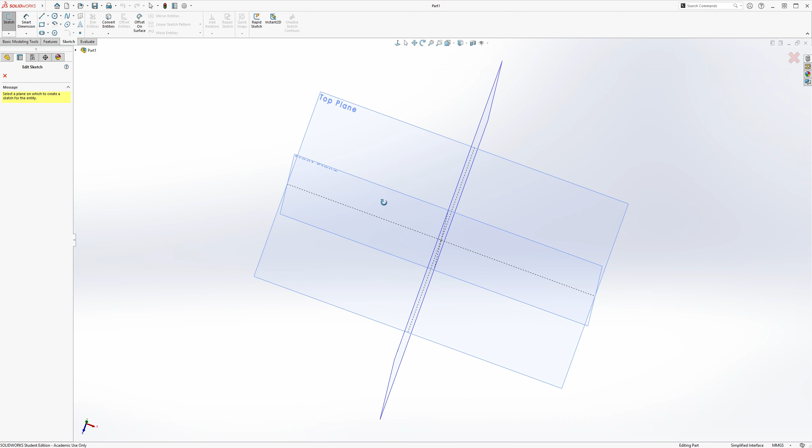And then we're going to make our rectangular base with a center rectangle. It's a 15.8 by 31.8 rectangle.

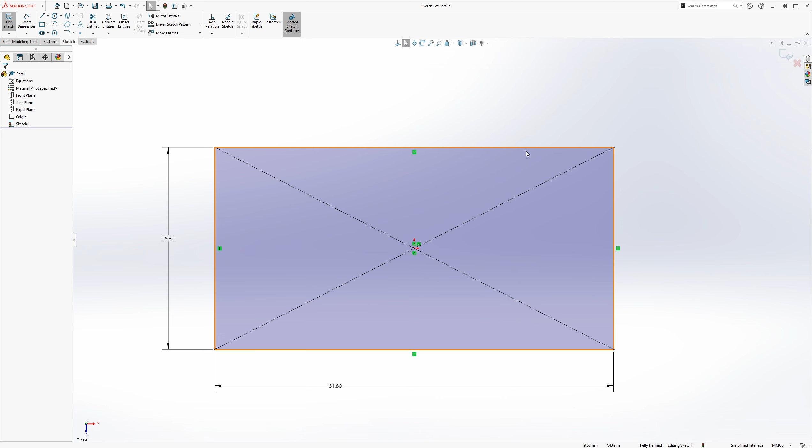And it's going to be extruded upwards by a depth of 9.6, but we're not going to extrude it normally. We're going to use the thin feature in order to make kind of a hollow extrusion. I believe it works in a way where it kind of automatically offsets the shape that you drew.

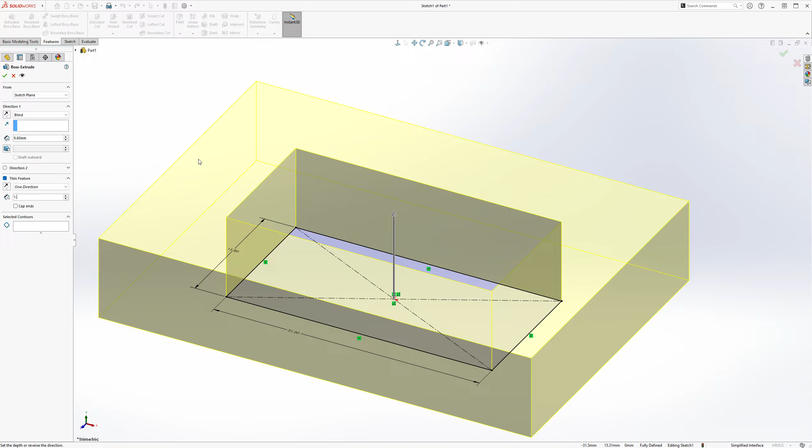And so we need to figure out what the offset itself is. I believe the offset is 1.4, and it should be offset inwards like this. Let's make sure it's 1.4. Yes, it's 1.4, 1.4 offset inwards for the thin feature.

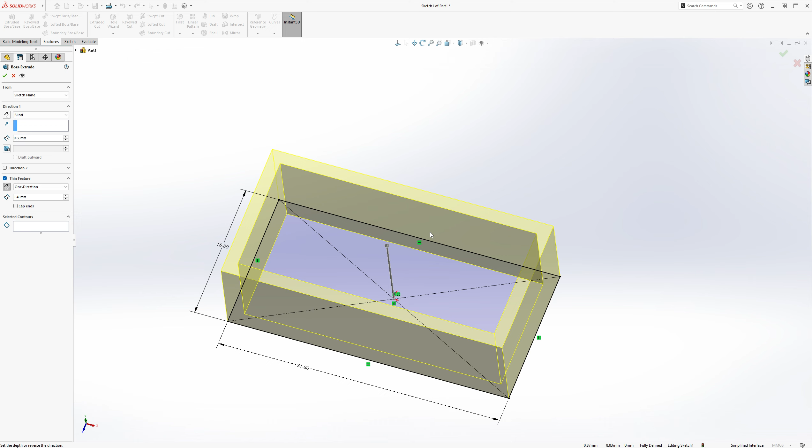And once I click OK, you'll see that both ends are open like this. So we'll have to make an extrusion at the top. So I'm going to make a sketch on the top surface.

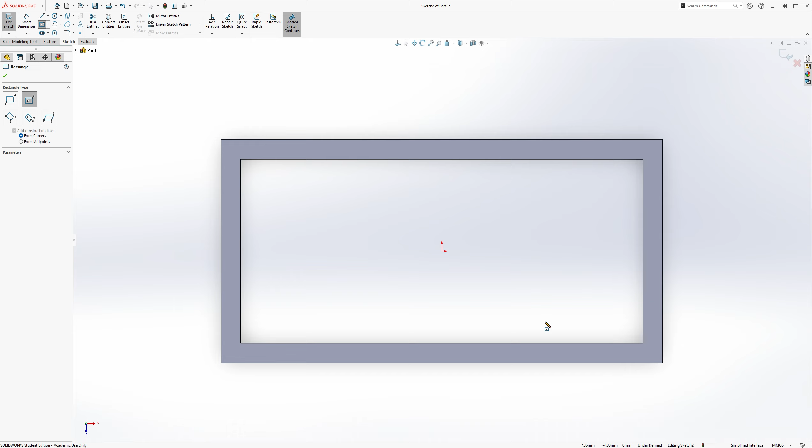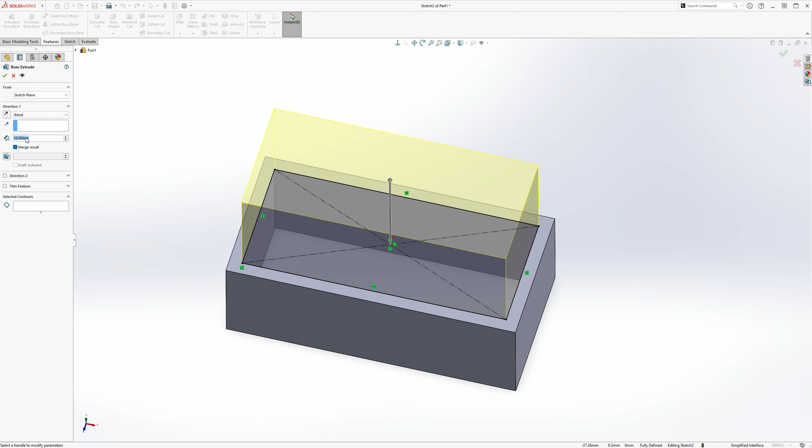And we'll make our same center rectangle, but this time I'm going to extrude it downwards. So first we're going to make the center rectangle fill in the entire gap. It's fully defined, and we'll extrude it downwards into the extrude by 1. This is going to serve as our base for the ceiling of this part.

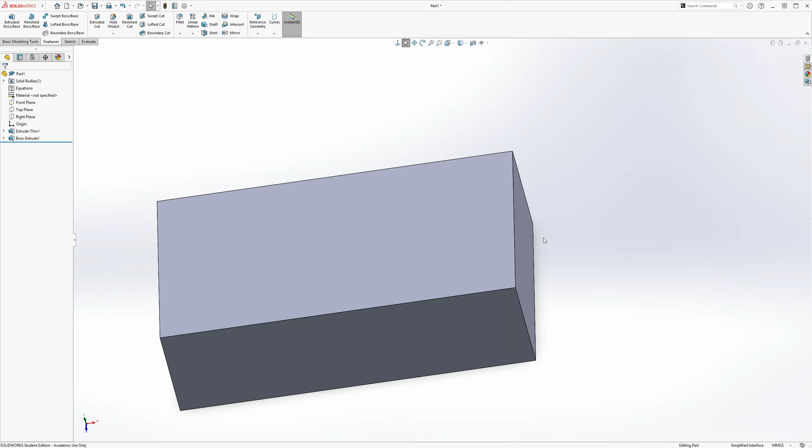So this is where we're going to have our circular pattern for the circle extrusions at the top, and this is also where we're going to make our circular cuts inside of those circular extrusions. So we'll start with the easy part, which is circular pattern on the top. I'm going to make a sketch on the top side.

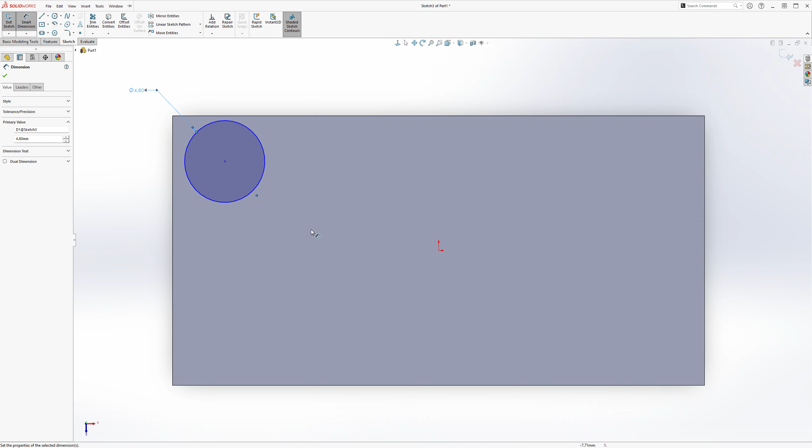Start with an arbitrary circle. Its diameter is going to be 4.8. Its horizontal distance from center point to origin is going to be 12. And its vertical distance from center point to origin is going to be 4. So now it's fully defined.

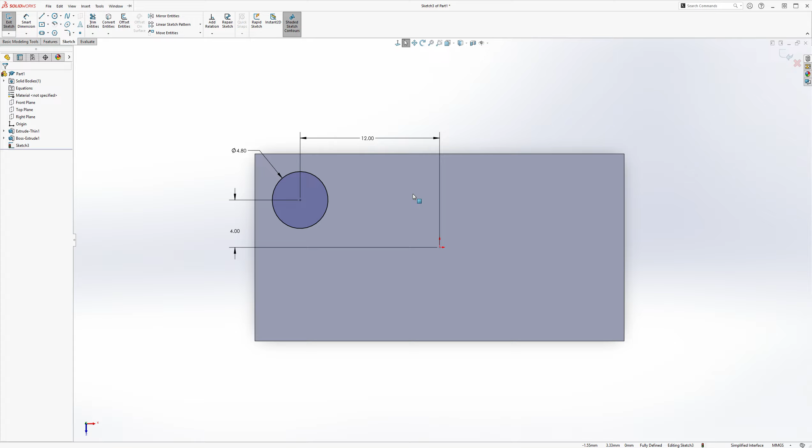Then we will extrude this upwards by a depth of 1.8, and you get that from the right view. 1.8. Select OK.

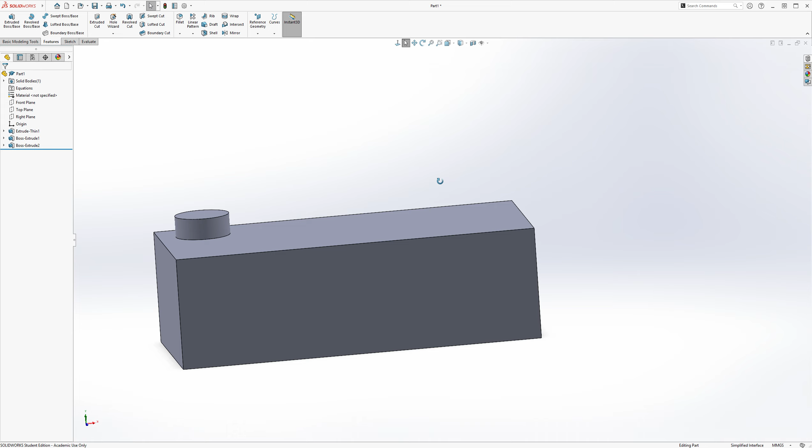And we could go ahead and pattern this right now, but I want to go ahead and make the hole incision that's going to be made inside of this extrude first, so we can do a linear pattern of both features at the same time. So I'm going to make a sketch.

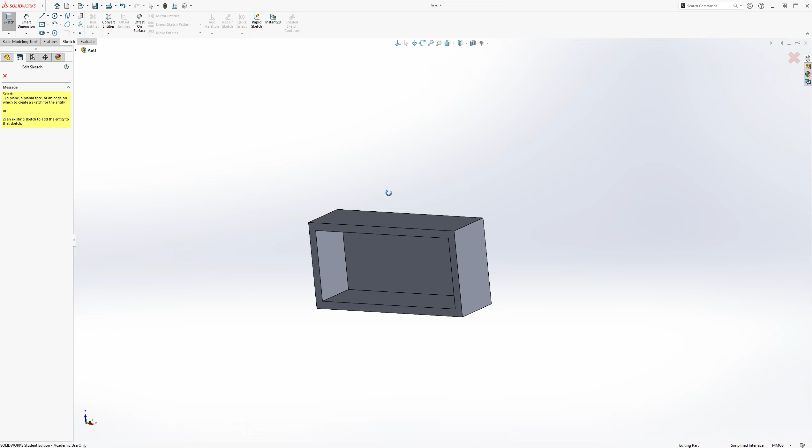Yes, I'm going to make a sketch on this bottom face here. And then I'm going to have to make a circle right here. So this circle is going to be pretty much underneath the previous circle that I made.

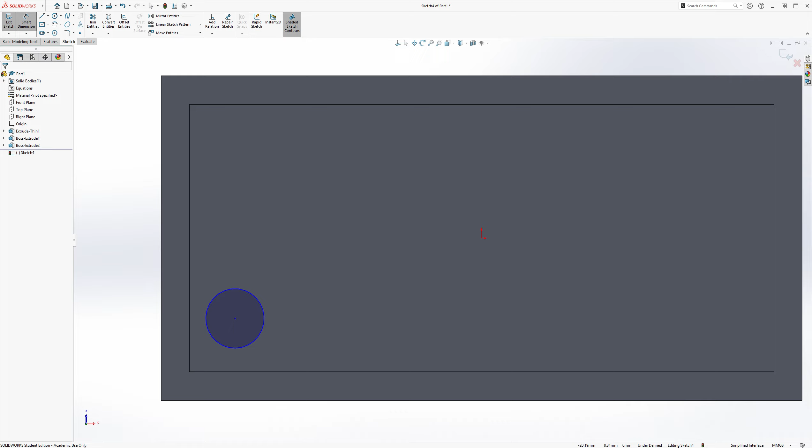And let me find its diameter. You'll see it from the underside view at the bottom of the engineering drawing. So it'll be 2.6 in diameter.

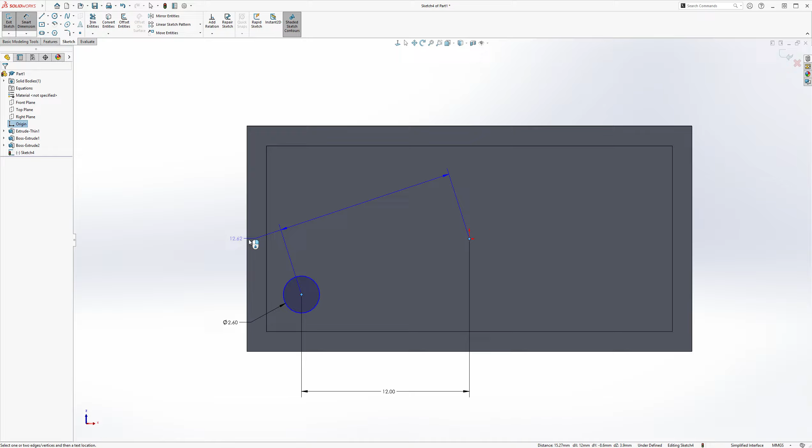And its center point dimensions are going to be the same as before. Because it shares the same exact center point, it has to have the same dimensions. So its horizontal distance from center point to origin is going to be 12, just like before, and its vertical distance from center point to origin is going to be 4, also just like before.

So from here, we need to make a cut. I'm going to go to Features, Extrude Cut. And then this is a weird part where we need to figure out what the depth of this cut is.

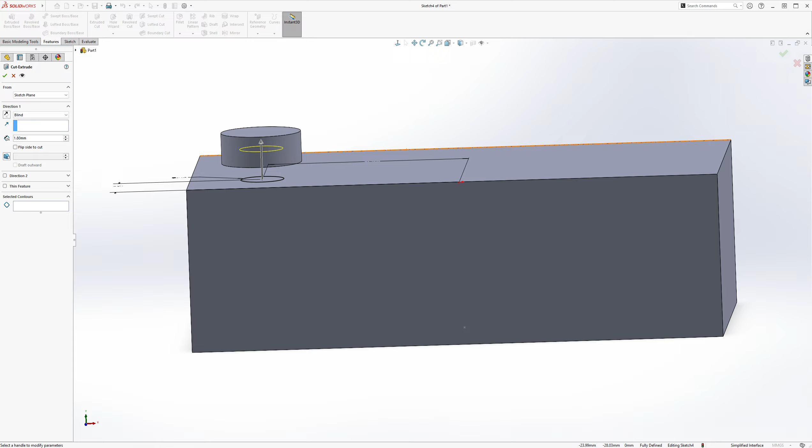So from section AA view, you see that the cut starts from the bottom of the ceiling, the 1mm extrusion we made earlier with the center point rectangle. It starts from the bottom of that ceiling and goes up, but it doesn't go all the way to the tip of the cap here. It only goes a certain distance into it.

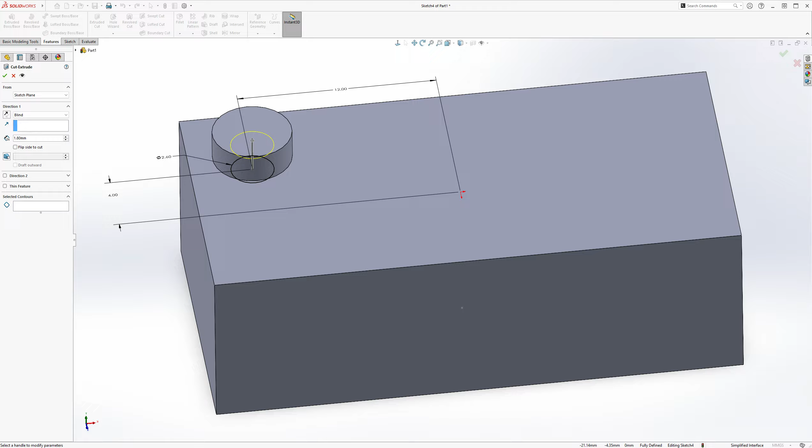So the height of the cap is 1.8, and the height of the ceiling is 1, so that total depth is 2.8. But if you look closely at the section AA view, you'll see that the distance from the top of this cap to the top of the extruded cut is 1.1. So you need to subtract 1.1 from 2.8, which gets you 1.7. So you know the hole has to be a depth of 1.7. There's a little annoying math you need to do there, but the depth is going to be 1.7.

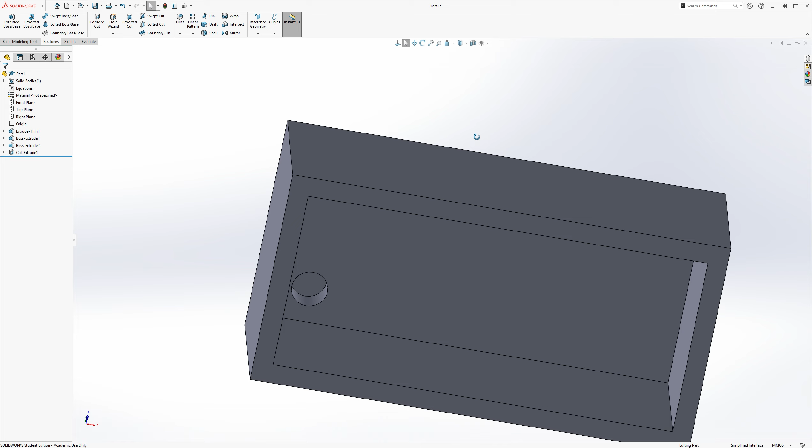If you made this circle from the bottom of the ceiling, so 1.7. So there's a hole, there's the cap.

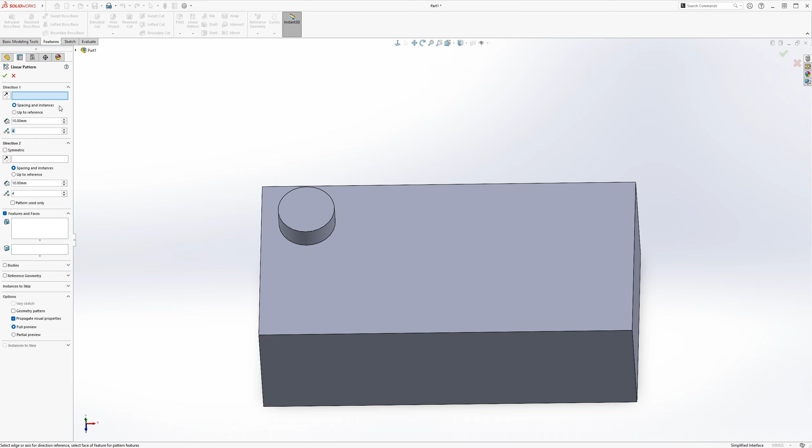And now we can just use linear pattern for features. We'll click linear pattern. There's 8 total, so it's 2 across and 4 long ways. Long ways will go 4 instances, our direction will be this, and our pattern will be first the cap cut or cap extrude, and then the cut itself.

I'm not sure why the preview is not showing. Oh, there it is.

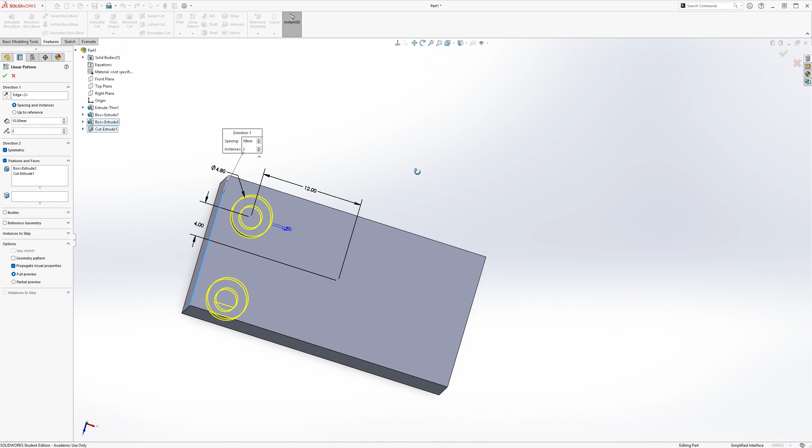So direction 1 - or maybe the wrong direction? Well, direction 1 should just be 2 instances then. Oh, I see, I think it's a spacing issue. So the spacing between them, spacing between each cap is going to be, I believe, 8. Yes, it is 8. Because the distance between the center point of one of those caps and the center line is 4, and then you'll do that twice to get to the next center, so it's 8.

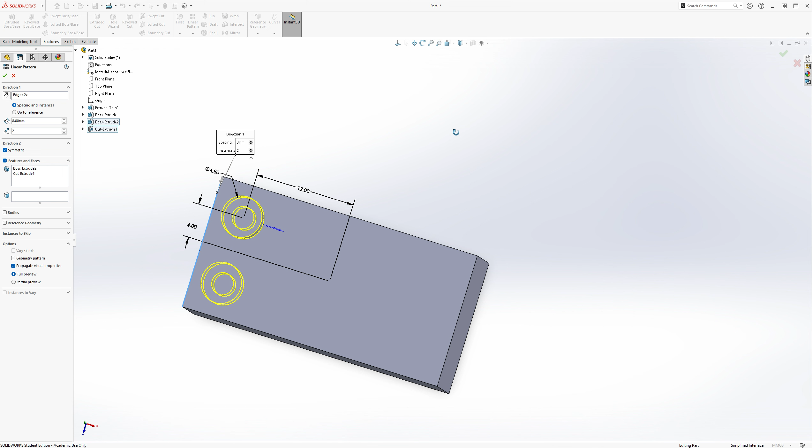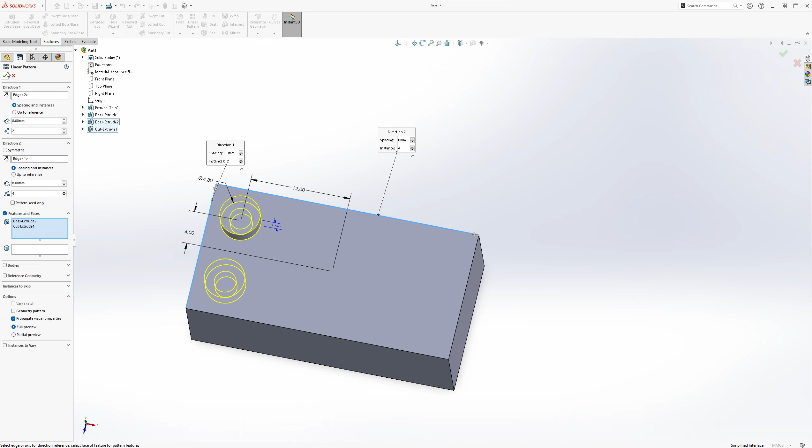So the distance between them is 8. We'll do 8 short ways, and then in the opposite direction - oh wait, hold on, okay let me reset this whole thing. That looked a little weird, not sure what happened there.

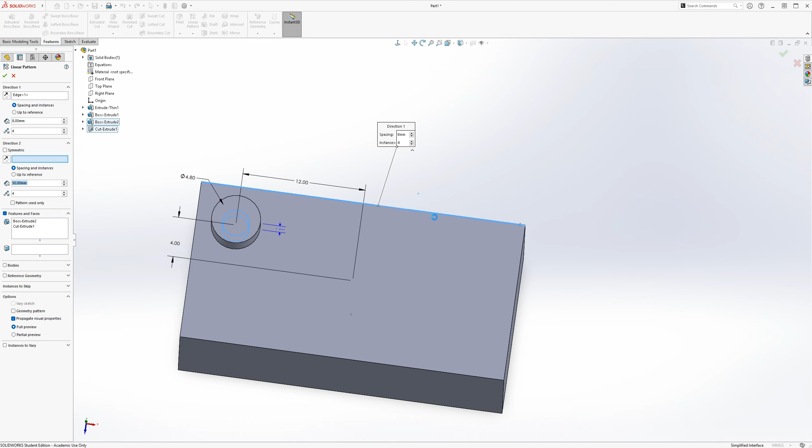I think I messed up the order of it. I need to set the feature first, so which will be the extrusion and the cut. And then I think we'll just do one direction at a time. So the gap between them is going to be 8, and the number of instances should be 4. The direction I want to choose is this direction. So I guess we'll just select OK for now.

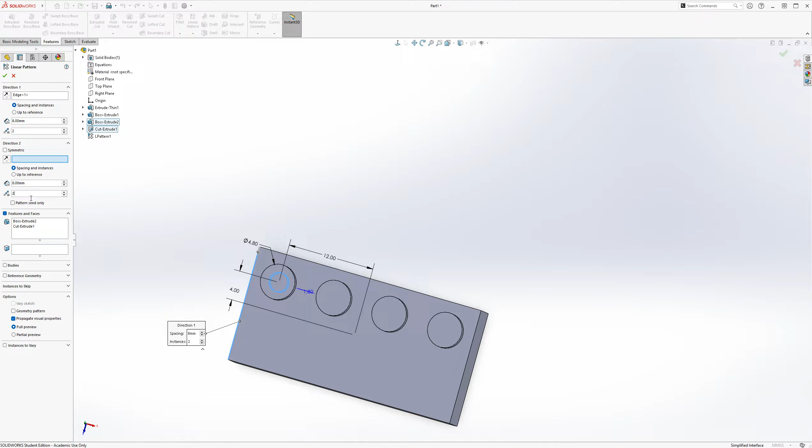And then we'll pattern that again, using features and faces, so the extrude and the cuts. Oh, maybe my direction was going the wrong way. Like... oh, it was because both directions were selected at the same time. That's why, it was only supposed to be one direction. So it was supposed to go like this.

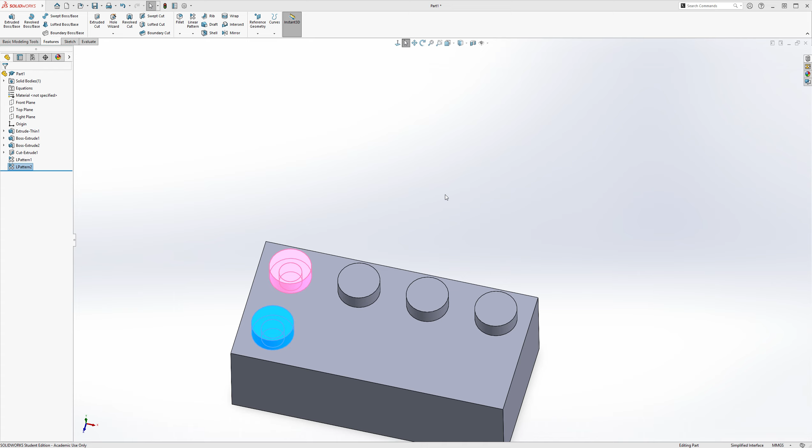Oh, okay, wait, let me reset the linear pattern then, if that's the case. So I'm going to click linear pattern, and I'm going to select the extrusion with the cuts. And then we're going to have 4 instances with 8 spacing along this line. So there you go.

And then we're going to make a symmetric - wait, hold on, no. So I want 4 along this edge, and then the second edge, I want it to be in this direction, but 2 instances. And I want it to be symmetric.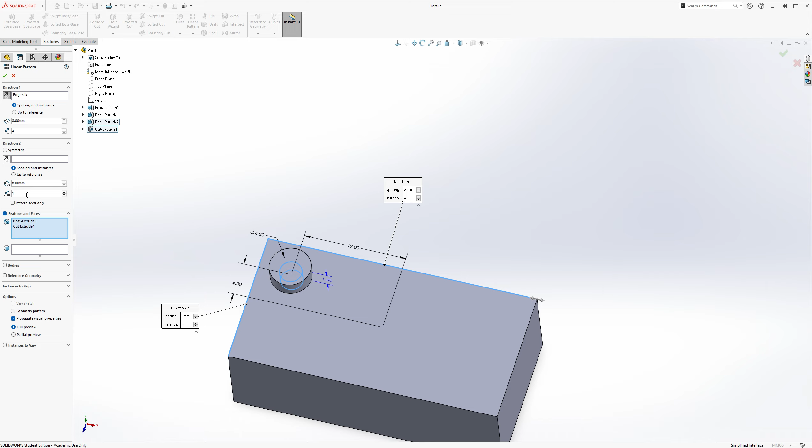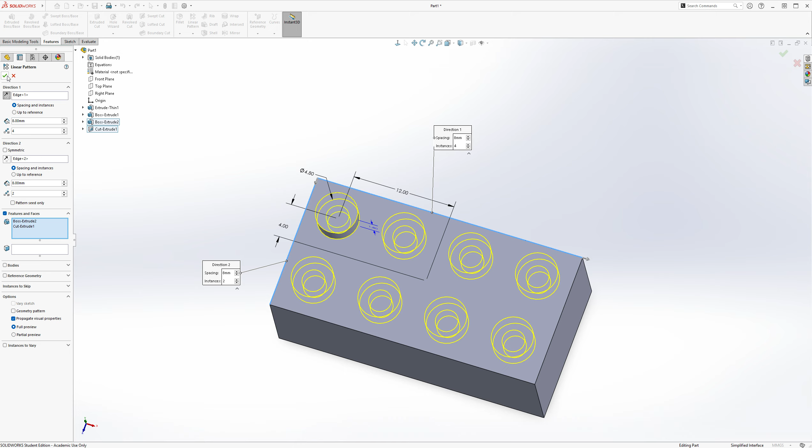Direction 2 should be along - oh, it's going the wrong way, I believe. The instances should be 2. Oh, okay, so it was just copying it the wrong way, so I had to change the direction. Okay, so it's 4 by 2, so it's 8. Okay, now we got 8, along with all the cuts as well.

So then we're going to start working on the underside. The origin's at the bottom, so that's perfect. We're going to start our sketch from the top plane. I want to change the view, so I believe it's Control 8 to flip it - yes. If you click Control 8, it flips the view, so you'll have it like that.

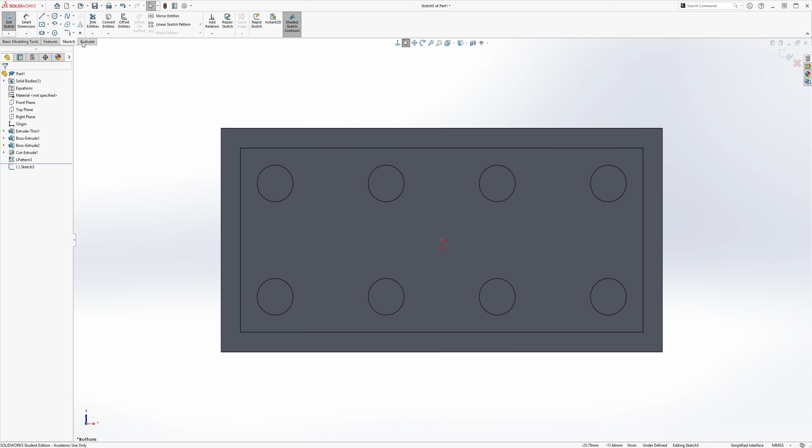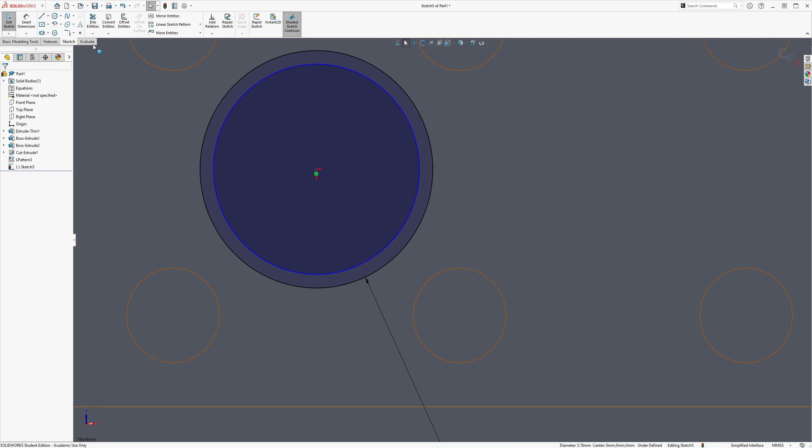Then let's make some concentric pairs of circles. The first one will be at the origin. These are the kind of rings that we're going to be extruding up to the next surface. So the outer dimension of the outer circle is going to be 6.5, and then the thickness between the circle pair is going to be 1.2. So there you go.

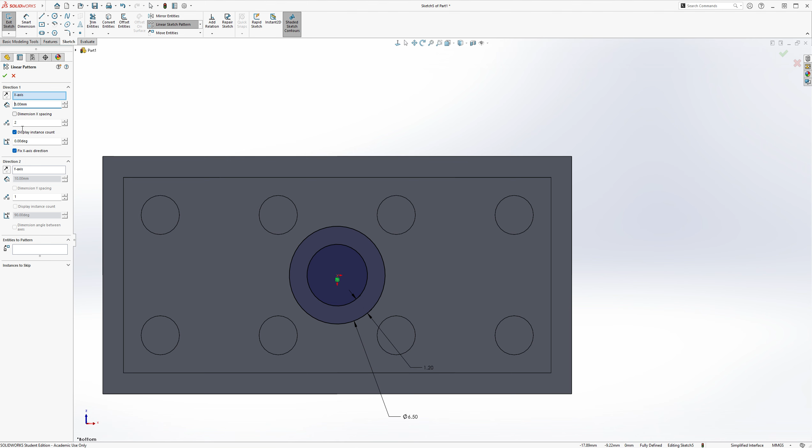And then you want to copy this onto the right and left side, so I guess we'll do another linear sketch pattern this time. I only want it in the X direction, and the spacing between them is 8. So let's just copy both of them over to the other side.

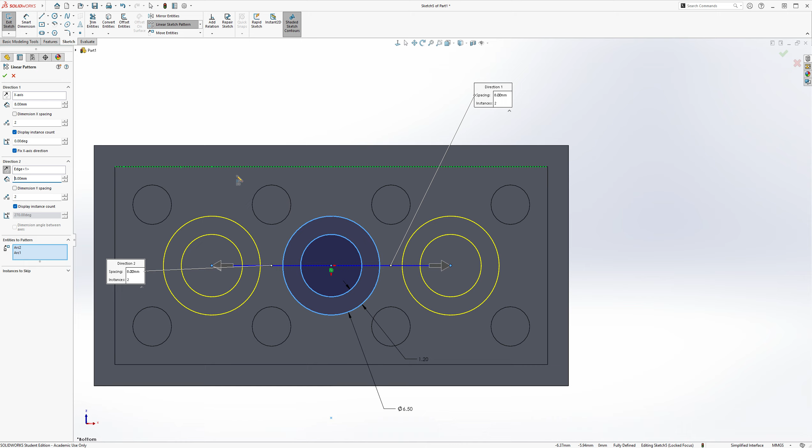And then let's see if we can do it in the other direction as well. Yes, so we'll do it in both directions. I just selected this edge to have it along the x-axis, so one on each side, 8 between them. I'll select OK.

And then I think if you want to fully define them, you've got to get their horizontal distances between them. So do 8, and I'll also do 8 for this center point as well. So 8 and 8.

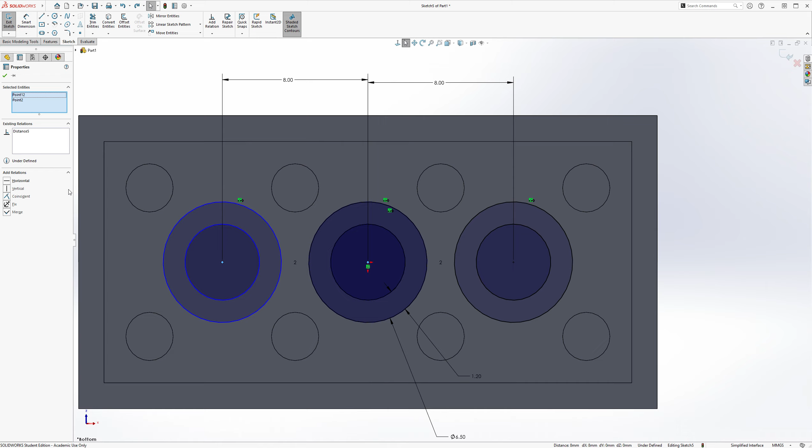Seems that this center point is still moving. So I'm just going to add a horizontal constraint between them, center points, and that should fix it.

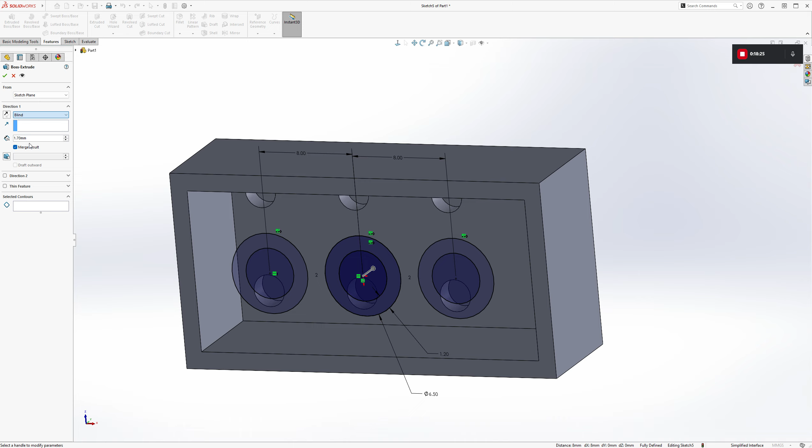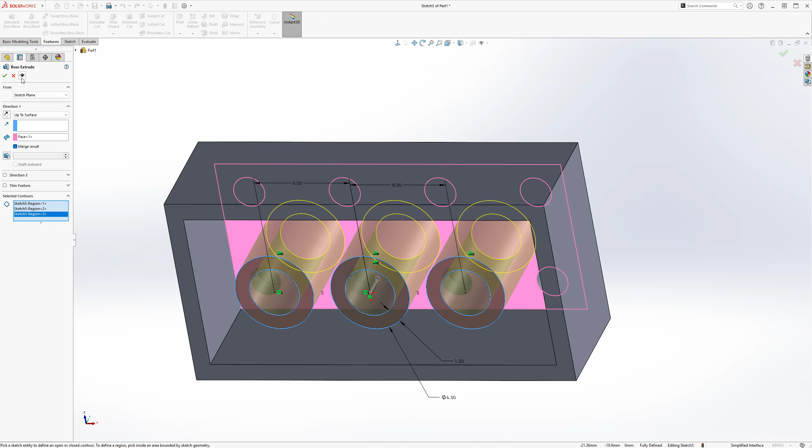And from here, what we're going to do is we're going to extrude these up to next. So I'm going to do up to next extrude, or I guess just up to surface, up to this surface. Do it like that, select OK. And they're hollow on the inside, just the rings, so that's good.

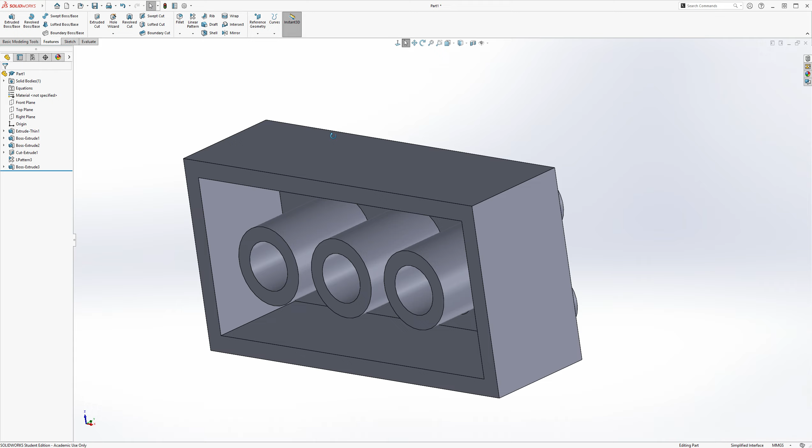And then from here, I think we'll add our ribs. Yes, we'll add our ribs. But to do this, I think we're going to need a reference plane. So I'm going to enable my plane views. And you'll notice that from the section AA view, the rib is actually offset 2.3 millimeters from the top plane.

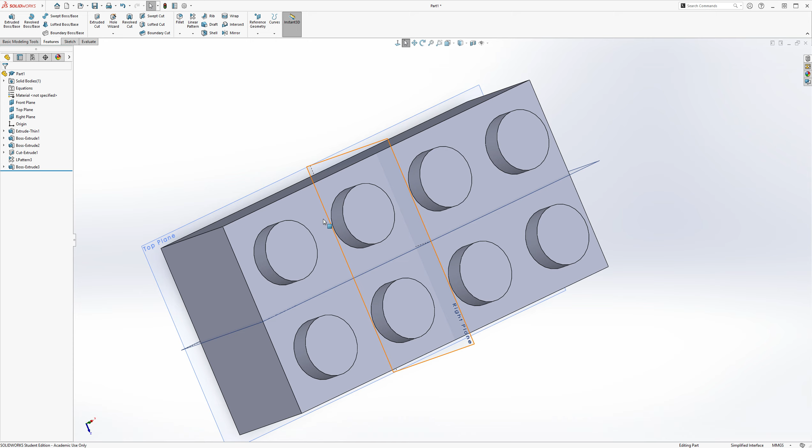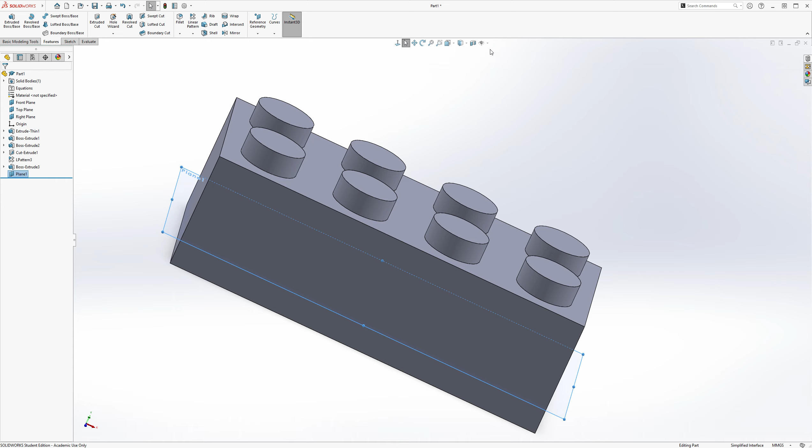So you're going to have to make a reference plane that's parallel to the top plane and offset by 2.3. So I'm going to control-click the top plane, and pull it a little bit upwards like this. And then we're going to change this offset distance to 2.3 instead. So there's your plane, select OK. I'm going to hide my primary planes.

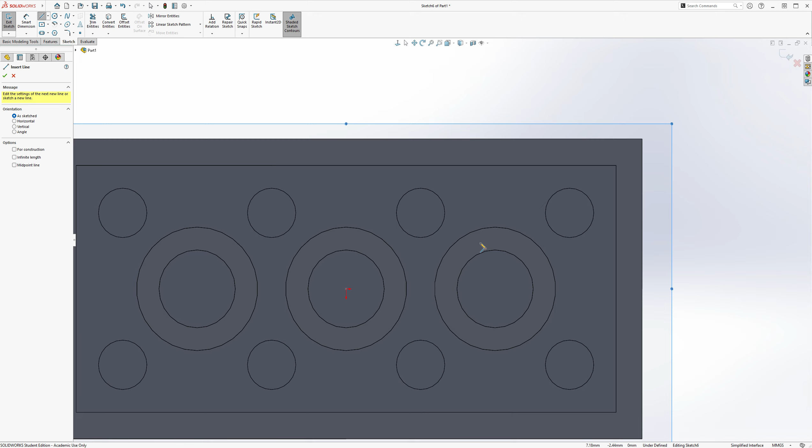And then I'm just going to start my sketch on this plane right here. Let's do Control 8 to flip it to the underside again. And so it's already offset by 2.3, so we can just start making our ribs. And to do that, we use the rib tool, which I believe is in the features tab.

So we just need our lines then. It's just a straight vertical line connecting from circular edge to that edge on both ends, just for the center circle. Then we'll exit sketch, go to features, then we'll click the rib tool right here.

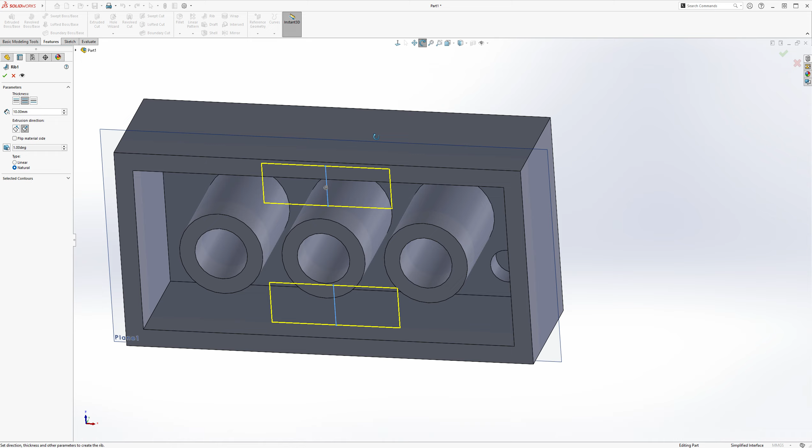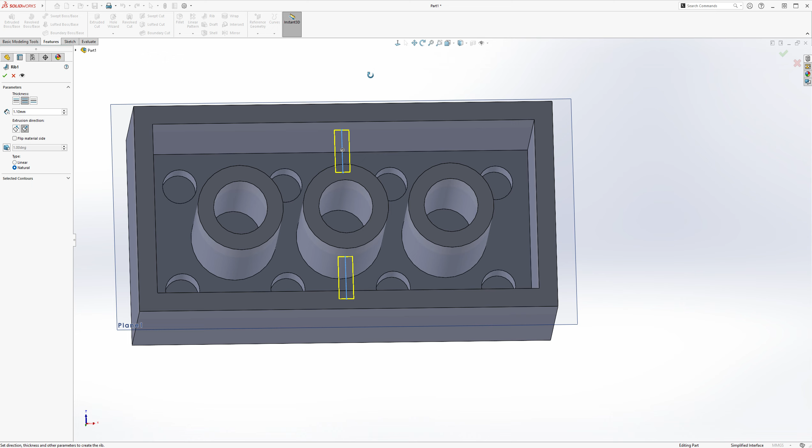Yes, and let's see what the depth is. It says... where is the rib? 1.1. Okay, so the rib has a depth of 1.1, or its thickness I mean, 1.1 millimeters. So there's your thickness, and it's going to be extruding.

It's going to be extruding in the opposite direction, so I'm going to change the arrow so it's pointing up towards the other side. And then we're just going to select OK. There you go.

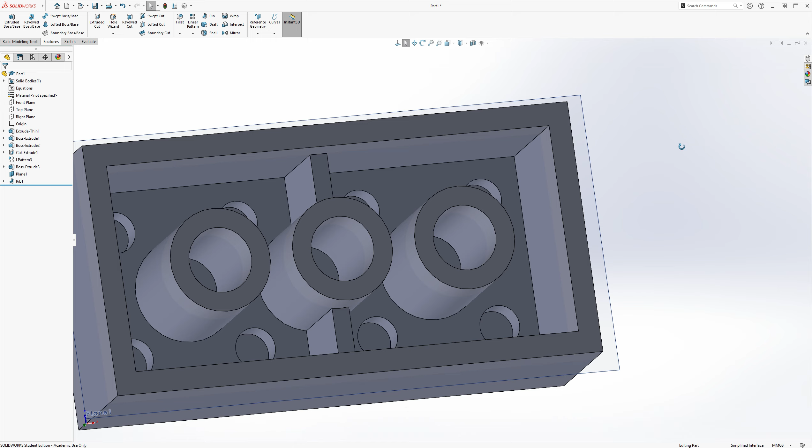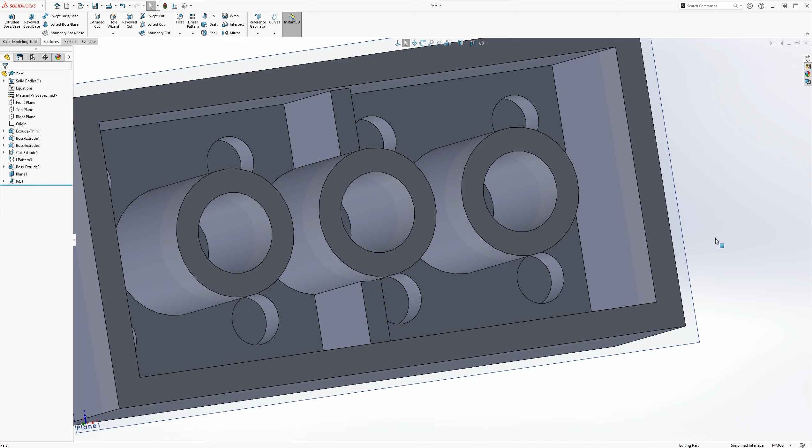And you don't need to worry about the rib not being extruded flush to the cylindrical surface, because the rib tool automatically extrudes it upwards and to both sides. It basically extrudes in every direction from which the original sketch was coincident with different solid features—if the sketch was coincident with 3 different solid features, it will extrude in those 3 directions. So it covers every single space, which makes the rib tool very unique. So we don't need to worry about that.

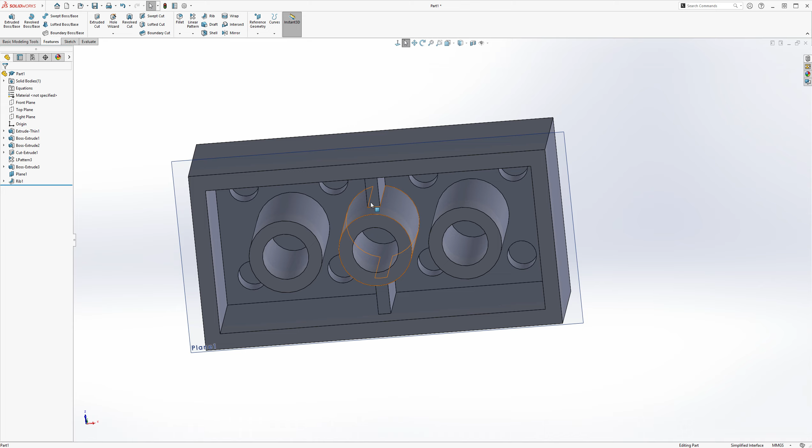So after the rib tool, the final step should be those kind of, how'd you call it, those little bumps that are sticking out on the side wall along this wall right here. So we're going to create them. And those bumps also appear to be extruded from the top view upwards, so we're going to do that.

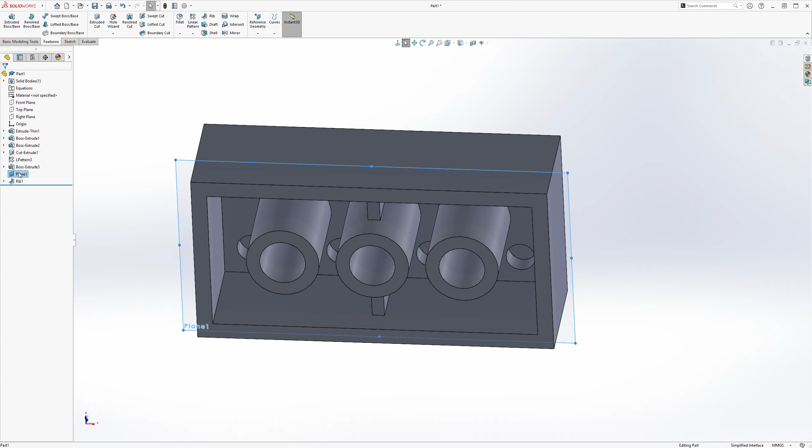First, I'm going to hide this plane because we don't need it anymore. So let's start a new sketch on the top plane. Just like before, let's do Control 8 so we can get to the bottom side view.

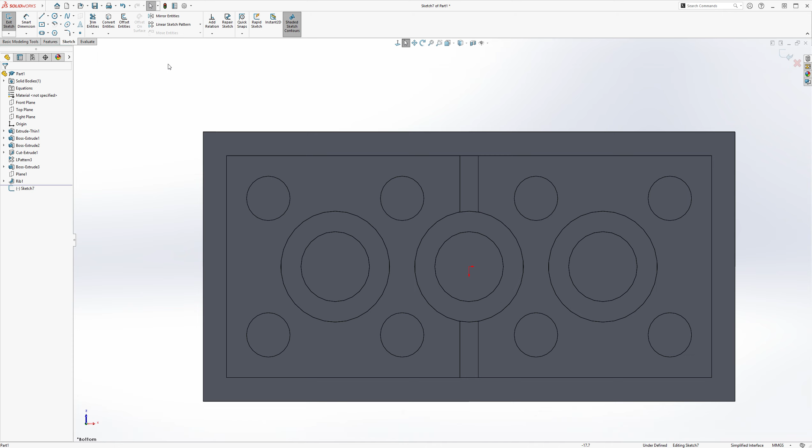The first thing to notice about the bump is that its center point is clearly aligned with the center point of this circular pattern. So first I'm going to find the midpoint of the circle. I'll use the point tool to attach a point there as a reference.

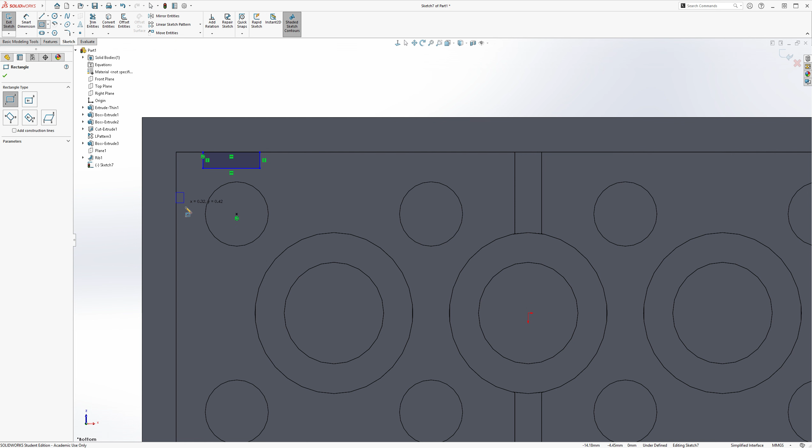Then I'm going to get some corner rectangles. Let's get a corner rectangle here - that'll be my first bump horizontally. And I'll get another vertical rectangle here - that'll be my second bump vertically.

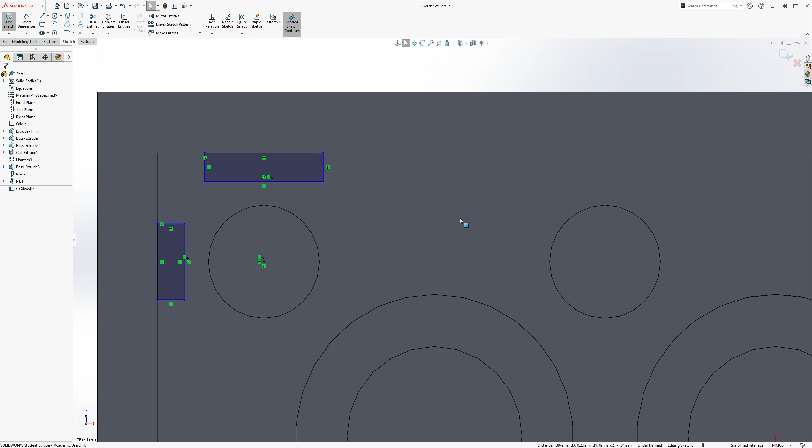First of all, let's line up the center points. This will be horizontally coincident, whereas this bump center point will be vertically coincident with this circular center point. And then let's find their dimensions.

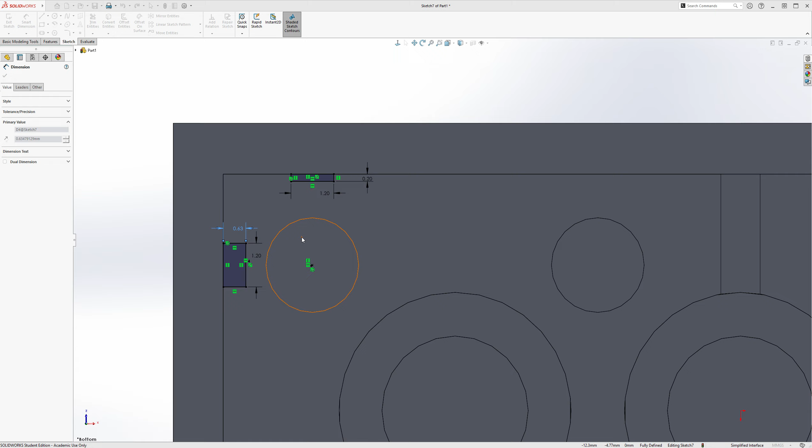From here, we're just going to do a linear pattern. Well, actually, no - we'll extrude them first. But here you need to be careful that you're only extruding one of them, because if you extrude both and then do a linear pattern, it's going to pattern both in one direction, and you don't want that. You want one extrusion per pattern, since you're patterning in two different directions.

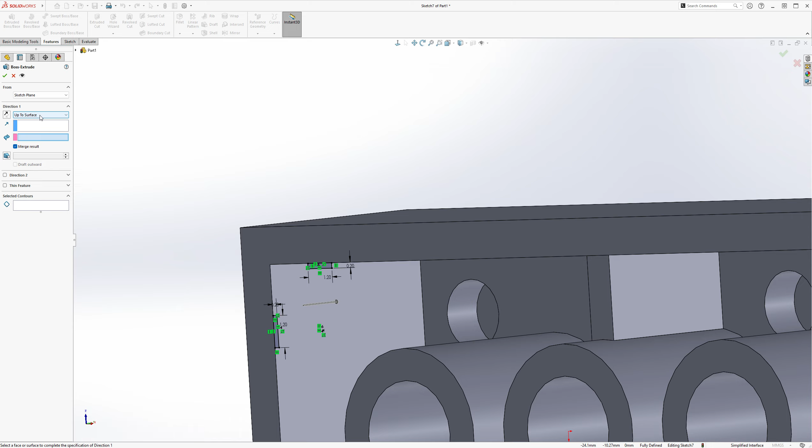So we're just going to do up to next, but we're only going to select this contour right here - that's the one we want. We'll leave the other sketch for now.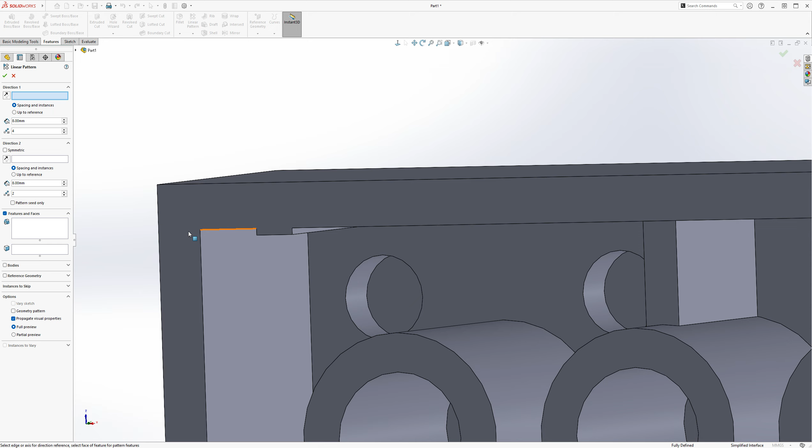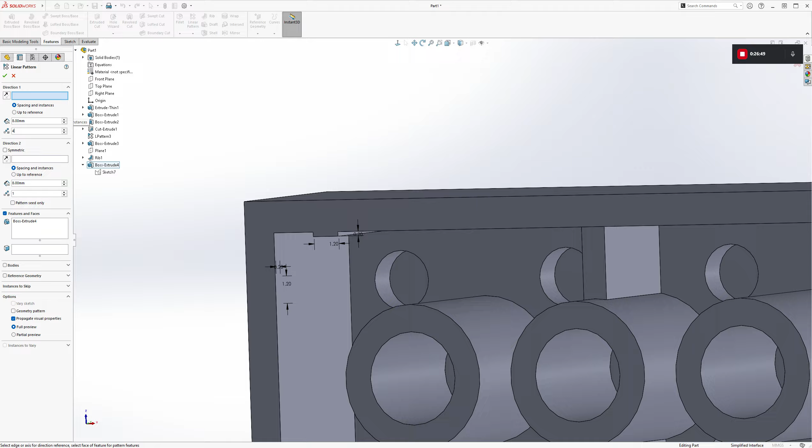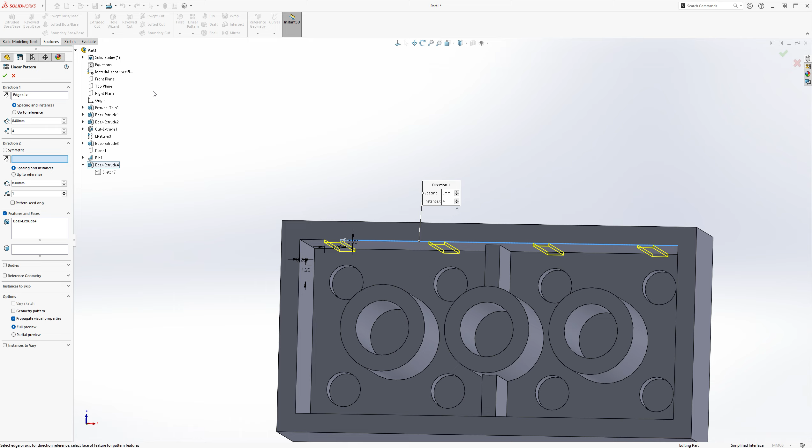I'm going to pattern this across long ways, so I'll do a linear pattern. We'll choose the feature we just extruded. How many instances do we want? We want 4 instances, with a spacing of 8 in between - the spacing between them should be 8, because their center points are aligned with these circular cuts, which are distanced by 8. So these will also be distanced by 8. 4 instances, and in this direction just select this edge and you get those. So we'll select OK for now.

Then we'll go back and extrude from the sketch that we made - sketch 7 for me. And I'm only going to select this contour as the one to extrude this time. Select OK.

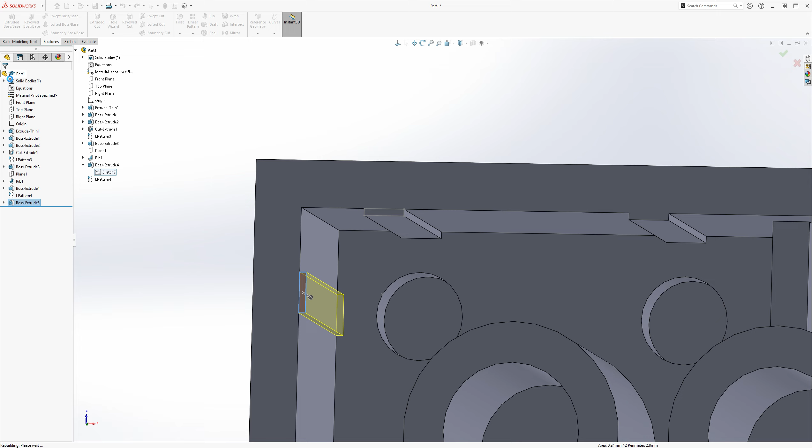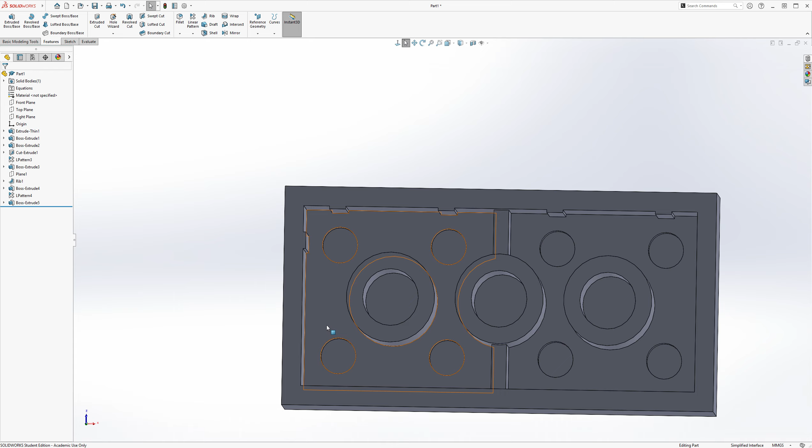So then from here, let's see here. I don't think we need to make a pattern. I think we could just use the mirror tool, because this vertical bump right here has only 2 instances, on the top and bottom half, and that sounds exactly like a mirror. So if you just mirror this, you'll get the other end on the opposite side as well, and you can mirror this tool onto the right side too. So we'll use the mirror tool. I'm going to enable my plane views.

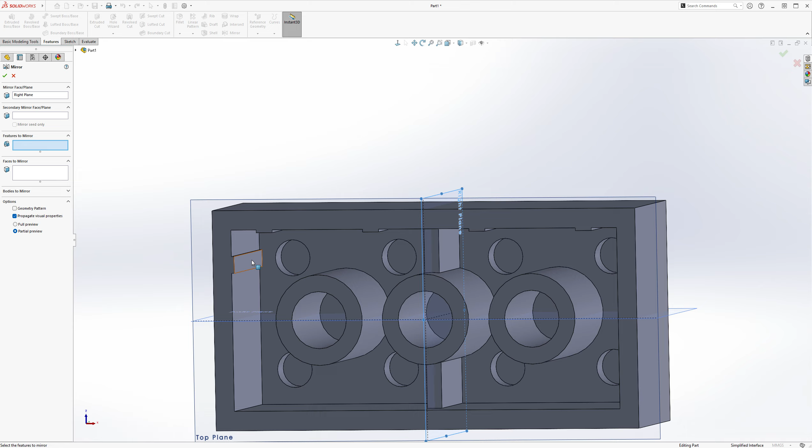I'll just click mirror in the features bar. My first plane to mirror will be my right plane, and then I'll select the vertical bump, this right here. I'll just mirror that once. And then now I'm going to select literally everything and mirror them all to the other side. So let's do another mirror.

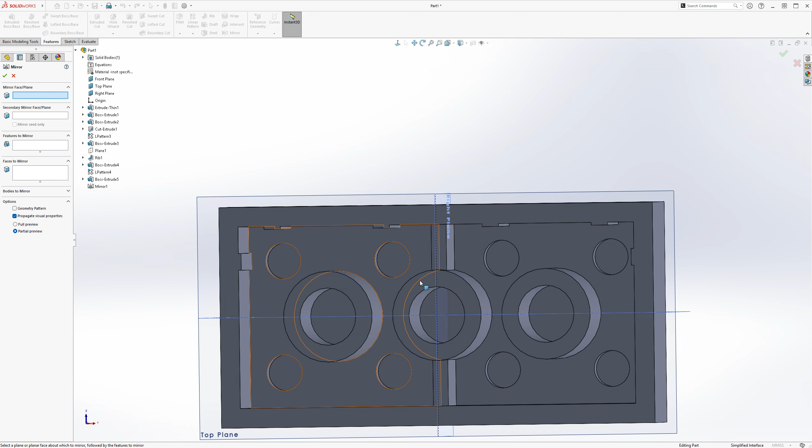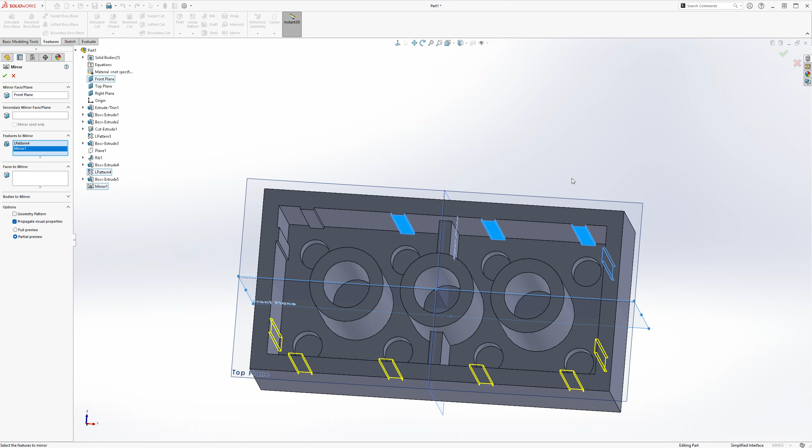This time the mirror plane will be the front plane, and the features to mirror will be my linear pattern and my mirror pattern - that should be it, that's all I need to mirror, I believe. So I'll select OK. Now everything's mirrored.

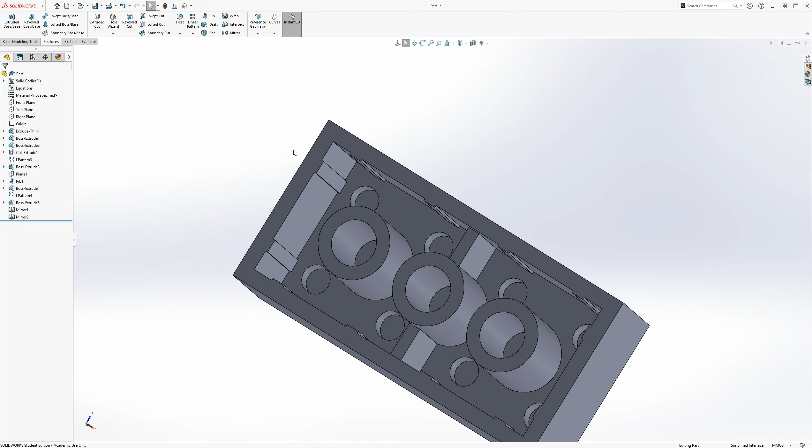Now we have all 10 bumps. Let's hide our planes and see if we're missing anything: 3 rings, 2 ribs, 10 bumps, and then a 4x2 hole cuts embedded inside of a 4x2 circular pattern extrusion. That should be it. Yes, that should be it.

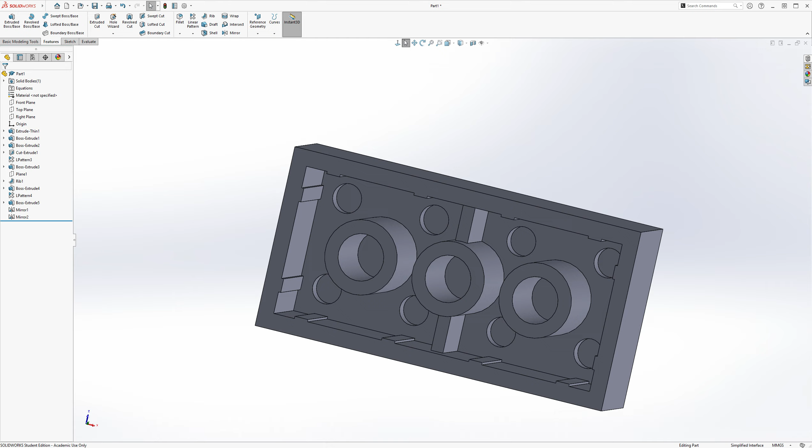So I guess we can go check our answer now. If we go to Evaluate, Mass Properties, and check for the volume - see here, the volume you're going to get is 2,355 cubic millimeters. So the volume is 2,355 cubic millimeters. I hope you learned something from this video, and I'll see you in the next one.